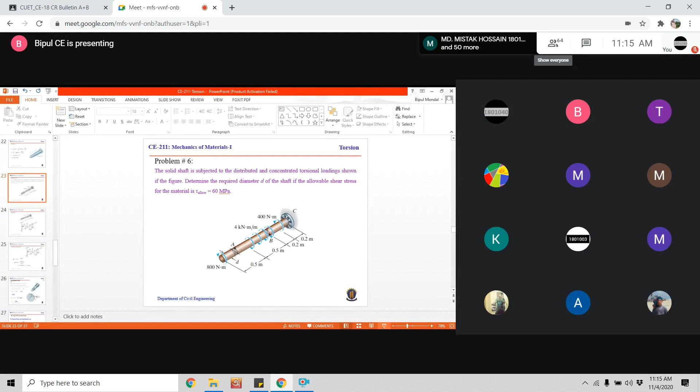Okay, in the last class I discussed how to draw the diagram. Is it clear to everyone? If this part is not clear... I drew this diagram in the last class. So is it clear to everybody? Basically, I am briefly explaining the problem.

Actually it is a solid shaft, and one end of the shaft is fixed to a support C at C. C is a fixed support. So, do you know what is fixed support, or what is indicated by fixed support?

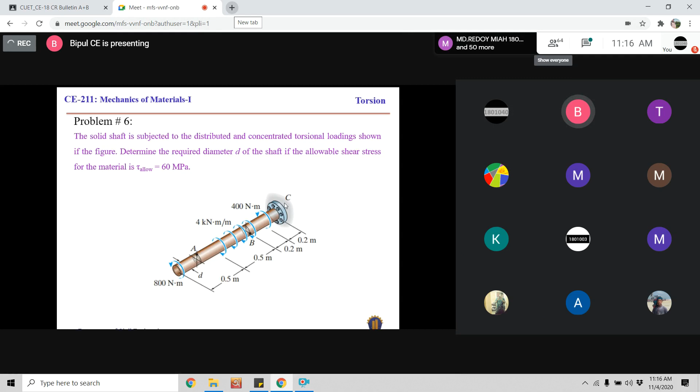Can anybody please tell me what is fixed support? We have learned many kinds of support. Hinge support, roller support, and another one is fixed support. Fixed means for any kind of material, any kind of applied load, basically axial force, shear force, bending moment, torsional force.

For different types of loads, the structure may be elongated or shortened. That means its length may be increased or decreased. That is one response. And another response is the structure may be bent, meaning it may be deflected downward or upward. That is bent, the effect of bending moment.

And for torsional force, the structure may be twisted, meaning the section will be rotated. So those are the responses: length may be changed, or the straightness may be changed, meaning a straight member may become curved. Initially it may be straight, but due to applied load it may be curved, and there may be rotation.

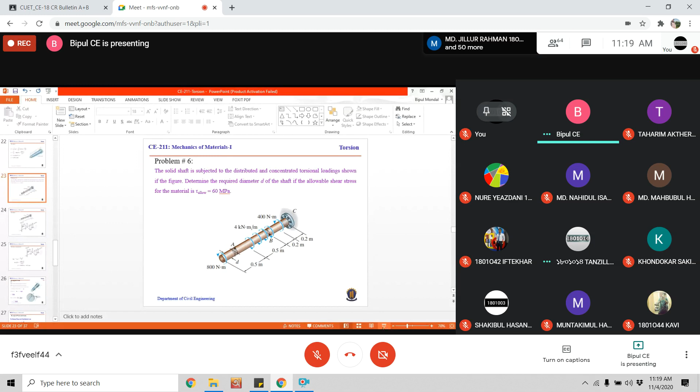So the strength of the material, allowable strength of the material, is 60 MPa. Strength of the material means the maximum capacity of the material. So if we consider the axial force, how much maximum load the structure or material can carry before failure, that is the strength.

But this one is the allowable stress. Allowable stress means, for example, a steel rod can carry 500 kilonewton tensile force, but for design purposes, we will assume that the steel rod will not carry 500 kilonewton until failure. We will assume it is 400. That means we will consider that if the applied axial tensile force is 400 kilonewton, then that rod will fail. In that case, 400 is known as the allowable axial force.

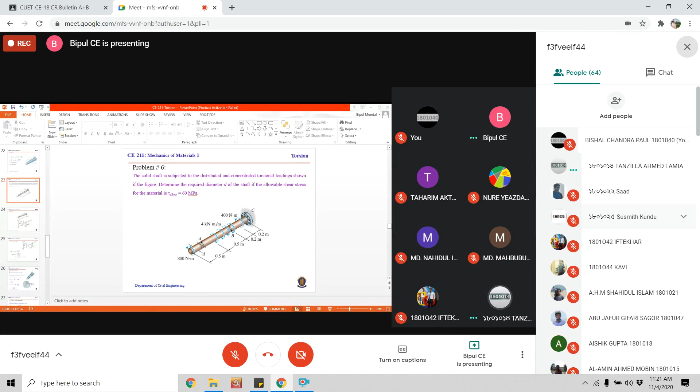Excuse me, someone's mic is causing noise. Roll number 1801014, you're muted, noise is coming from you.

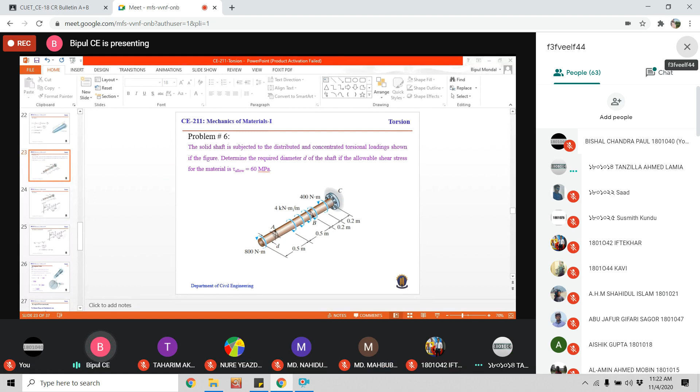Okay, so I was explaining what is strength and what is allowable strength. Strength means the maximum capacity until failure. But as the strength or capacity of the material may vary from sample to sample or location to location, that's why we apply some safety factor.

Safety factor means although the laboratory test indicates that this rod can carry 500 kilonewton tensile force, in the design process we will assume that if the applied load to that rod exceeds 400 kilonewton, then that rod will fail. In that case, that 400 kilonewton force is known as allowable tensile force.

So for the design process, we will not exceed the allowable limit. The allowable limit may be in terms of force or in terms of stress. That means we will assume that if the internal force, which may be stress or total stress or force, exceeds the allowable limit, then that structure will be failed.

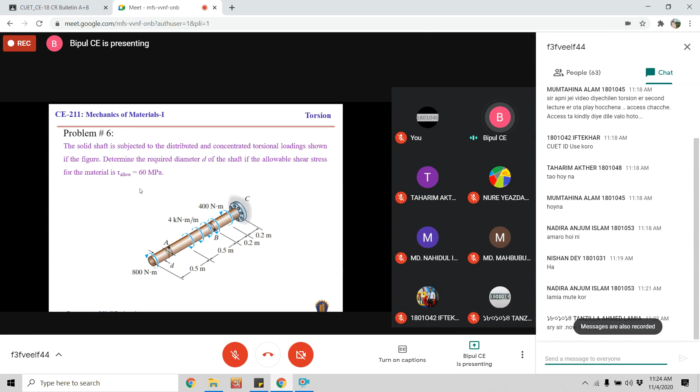One thing please: if I say stress, always assume it is shear stress, because we are talking about torsional force. Due to torsional force, only shear stress will be developed. So whenever I say stress, you will understand that it is shear stress, unless I say it is axial stress. So stress means shear stress.

So the allowable shear stress of the material is 60 MPa. That means if the shear stress at any point in the structure exceeds this value, that means if the shear stress is greater than 60 MPa anywhere in the structure, then that structure will be failed.

So to maintain the safety or integrity of the structure, that means to avoid failure of the structure, we will apply the load to the structure, or we will provide the section of the structure so that the maximum stress anywhere in the structure will not exceed this value.

So the allowable stress is 60 MPa. Then the diameter of the rod is not given; that we have to determine. Actually, this diameter means the minimum diameter. So what will be the minimum diameter that will carry or resist this applied torsional force?

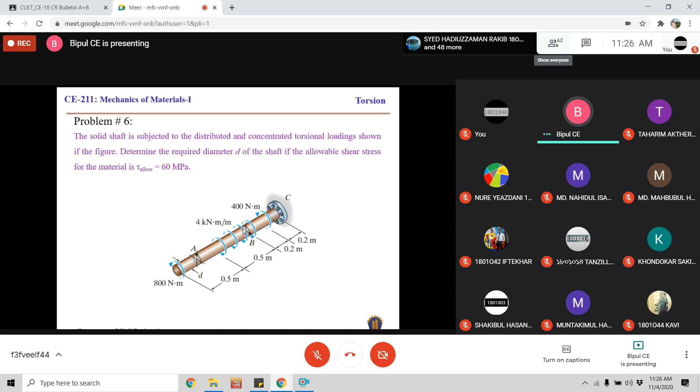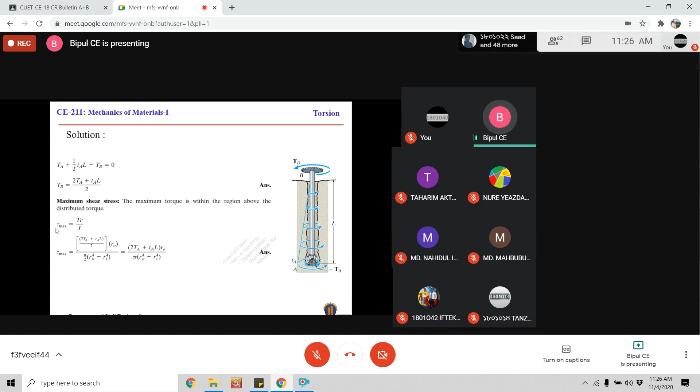So from the torsional stress equation, the equation of maximum shear stress is expressed by this equation. This is the equation of maximum shear stress due to torsional force. Here T is the torsional force, C is, for a circular shaft, the radius of the section, and J is the polar moment of inertia of the section.

So from this equation, it is clear that the value of maximum stress depends on the value of maximum torsional force. If the cross section of the shaft is circular, then C will be constant, that means the radius of the section, and J is the polar moment of inertia. So for any specific section, these two terms are constant. Therefore, the maximum shear stress depends on the maximum torsional force.

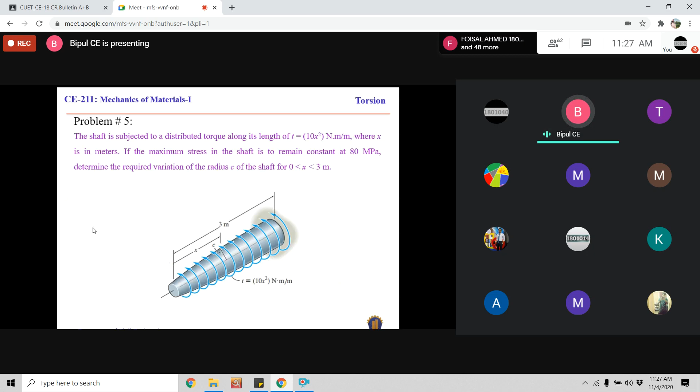So in this equation, this torsional force is the internal torsional force. That means if any structure is subjected to any torsional force, then a torsional force will be developed in the structure, and that is known as internal torsional force.

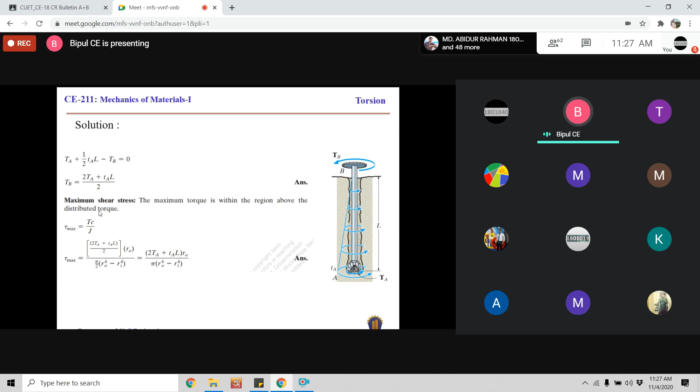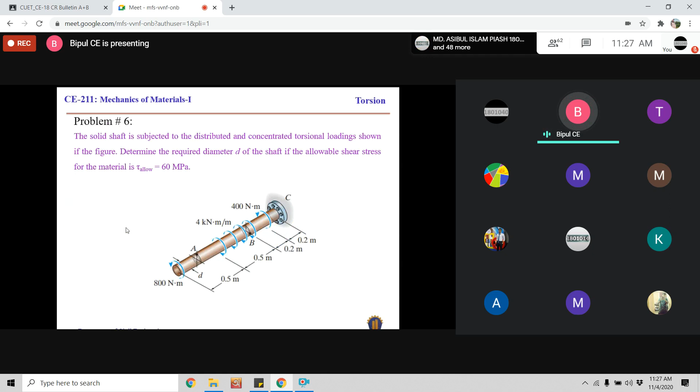So this T indicates the internal torsional torque, not the applied torsional torque. Okay, so we have to determine the diameter. According to the previous equation, we have to check

that the maximum shear stress in this shaft will not exceed this limiting value of 60 MPa. So we have to determine the maximum shear stress, the location of maximum shear stress.

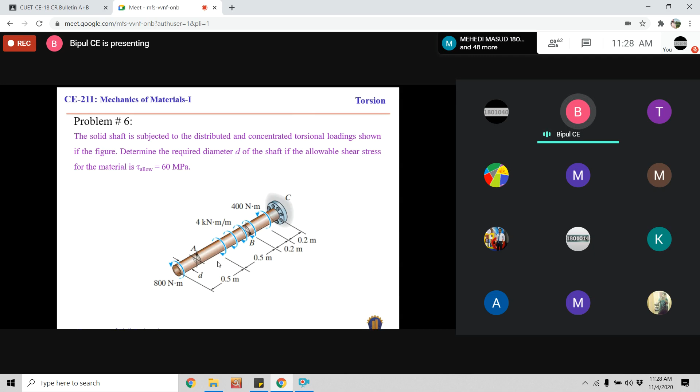From that equation, we have seen that the equation of maximum shear stress depends on the value of maximum internal torque. So we have to now find out where is the maximum resultant internal torque, and to determine it, we have

to see the variation of resultant internal torque along the length of the shaft, and from that variation we can figure out what will be the maximum internal torque, and that is indicated by this diagram. That is the torsional force diagram. So this diagram indicates the value of resultant internal torque at different locations.

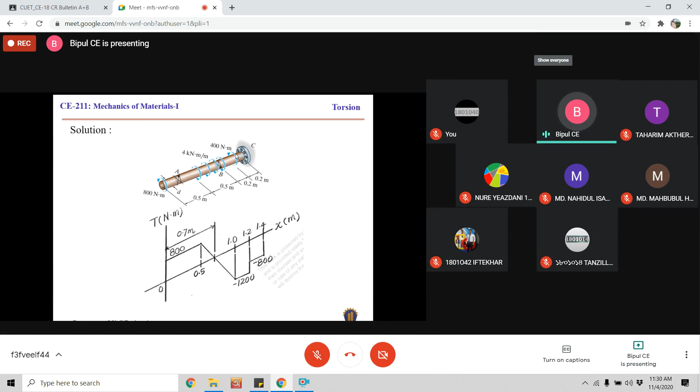So to draw this diagram, we have to start from one end of the structure. We can start from C, or we can start from here. We will start from here, then we will go towards the support. Then actually we will cover some length, and then that length is indicated by this axis.

And then if we go along this line, then we will face different internal torque, and that torque will be represented along this axis. So this axis indicates the internal torque, and that axis indicates the length of the shaft, or the location along the shaft from one end. So assume at this point the length is 0.

So if we move from here to here, then first we will face this internal torque. Then in this segment there is no additional applied torque, and if we cross this point, then we will face this applied uniformly distributed torque. And then if we cross this point, in this zone there is no additional applied torque, and if we reach this point, then we will face again this concentrated applied torque,

and in this zone there is no applied torque. So first of all, if we start from here, and if we just reach this point, then we will face this applied torque, and then according to the thumb rule, this torque is a positive torque.

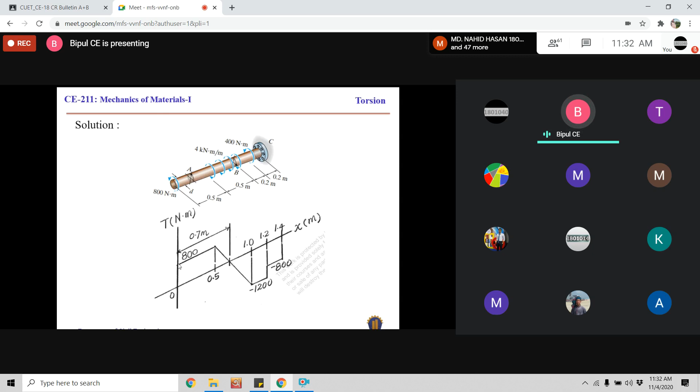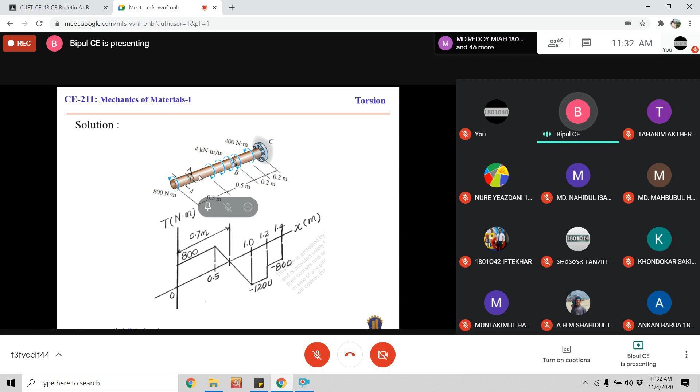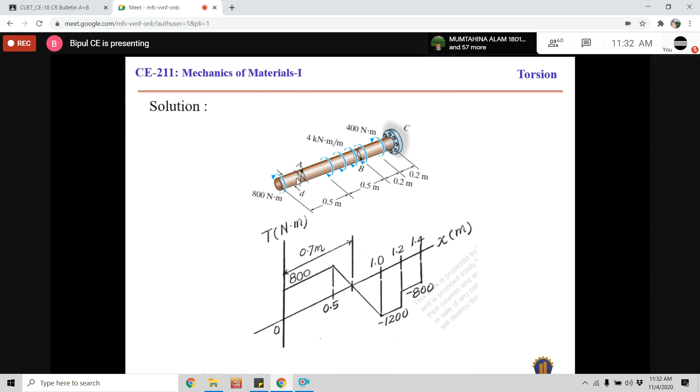And if you come anywhere in this segment, the internal torque will be similar to 800, because if you come here, you will see that the applied torque is 800, so the internal torque will be 800. So if you come to another point in this segment, similarly, as the applied torque is 800, the internal torque will be 800. So in this segment, from this point up to this point, there is no additional applied torque except this torque. That's why this line has gone along the x-axis, that is, the horizontal direction.

So up to this point, the internal torque will be 800. And then if you just cross this point, then you will face this uniformly distributed torque. So if you reach from this point to that point, then you will face additional applied torque, and that is 4 kilonewton meter per meter.

That means in 1 meter, the total applied torque is 4 kilonewton meter. So the total length from this point to that point is 0.5 meter. So the total applied torque in this segment will be 2 kilonewton meter, because this amount of torque is applied in 1 meter, but the segment is 0.5, that means half a meter. So in this segment, the total applied torque will be 2 kilonewton meter.

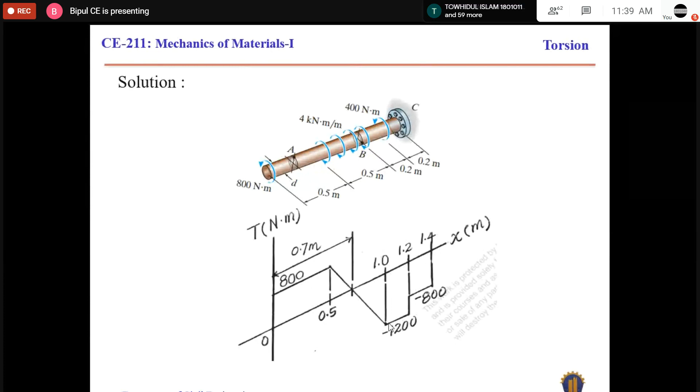So the maximum stress will be developed here. If we apply the equation of maximum stress, this is the maximum internal torque, C is the radius, J is the polar moment of inertia. C is the half of diameter, and this is the equation of polar moment of inertia.

This maximum stress will be similar to the allowable stress, that is 60 MPa. To convert into Newton per meter square, it is multiplied by 10 to the power 6. From this calculation, we have seen that the diameter of the shaft is 46.7 millimeter. It means that the minimum diameter of the shaft will be this one. If the diameter of the shaft is equal to or greater than 46.7 millimeter, then the maximum shear stress will not exceed this value.

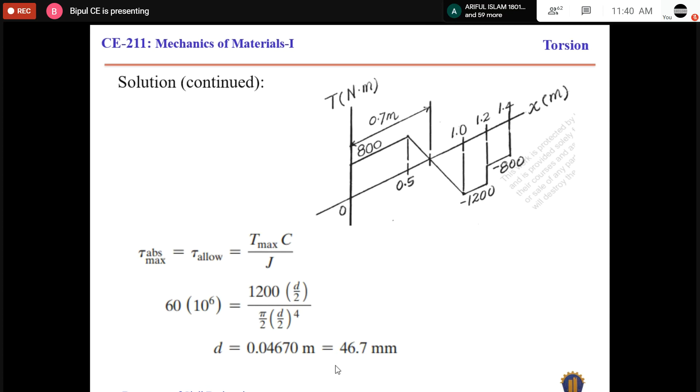And if the diameter is less than this value, then the maximum shear stress will be greater than this value. In that case, the shaft will fail.

And that is the angle of twist. I have already explained it in the last class. So angle of twist means the relative angle of rotation of one end with respect to the other end.

So this is a shaft having variable cross section. One end is fixed, another end is free. So Tx - this shaft may be subjected to a different amount of torque. So the torque will not be constant along the length.

So at a location, at a point located at x distance from this point, if the internal torque is T, that is indicated by Tx, because the internal torque is not constant along the length if the shaft is subjected to different amounts of applied torque. That's why it is indicated by Tx.

That means T is the internal torque. It depends on the location of the point. And Jx also, as the section is variable, so J will be different at different locations, and it is designated by Jx. That means the polar moment of inertia as a function of x, and theta is the angle of rotation or angle of twist of this end with respect to the other end.

So according to Hooke's law, the equation of shear strain is this one, and we know the equation of shear stress due to torsion is this one. Substitute this equation here. Substitute the variable terms here, Tx and Jx. And again, if you substitute here, then the general expression of shear strain will be this one.

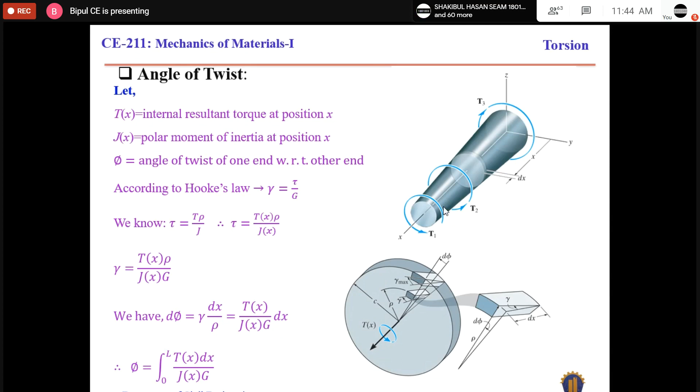So we have to integrate this equation from this to that, or from this to that. So it is 0 to L, where L is the total length of the shaft. So this is the general expression of the angle of twist.

And there are two expressions for some specific cases. If the cross section of the shaft is constant, and if the shaft is subjected to a constant torsional force, then angle of twist will be determined using this equation. But if the section is subjected to different amounts of torsion, or the cross section of the shaft is variable at different locations, then we will determine the angle of twist for each segment.

And if we sum the angle of twist of all segments, then we will get the total angle of rotation from one end to the other end. And it is explained by

this problem. Actually, it is a solid shaft. One end of the shaft is A to E. At E, the shaft is fixed to a support, and there is another support B, and this B is frictionless. That means if we rotate the shaft, no friction force will be developed at this location, and 3 gears are attached to this shaft. One gear is at A, another one is at C, another one is at D, and 3 torsional forces are applied by 3 gears.

At A, torsional force is 150, at C 280, at D 40. And there is a tooth P on gear A. Now we have to determine the total angular displacement of this tooth P, because due to applied torque, this tooth will be rotated either along clockwise or anti-clockwise direction.

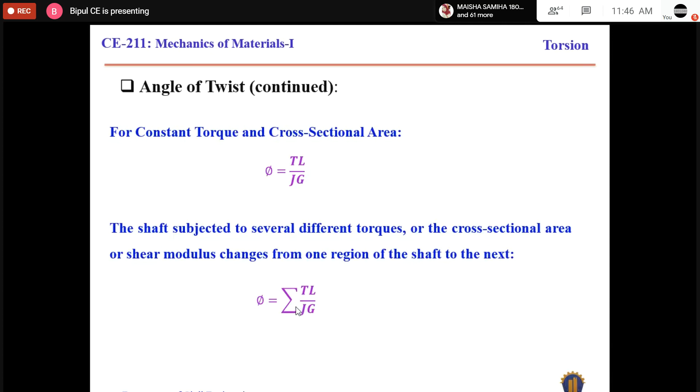To determine the angle of twist, we have seen that there are 3 segments: one A to C, another C to D, and another D to E. These 3 segments will be subjected to different amounts of internal torsion, so we have to apply this equation. To apply it, we need the length of each segment and the polar moment of inertia of each segment. Since the shaft is constant along the length, these will be constant, so only the length of each segment and the internal torque will vary.

So the length of one segment is 0.4, another is 0.3, and another is 0.5. We have to determine the internal torque developed in each segment.

In segment AC, the internal torque is 150, because if we cut anywhere in segment A to C and draw the free body diagram, and consider the equilibrium condition, the applied torsional force will be equal to the developed internal torque. According to the thumb rule, this one is positive. So in segment A to C, the resulting internal torque will be positive 150.

Similarly, for segment C to D, we cut in the segment and draw the free body diagram. From this free body diagram, the positive internal torque is 150, but this one is negative according to the thumb rule, so the resultant internal torque will be negative 130. Again, by a similar process for segment D, the internal torque will be negative 170.

We know the equation of angle of twist is TL by JG. For segment AC, internal torque is 150 and length is 0.4; for CD, internal torque and length are as given; and for D, likewise. From this calculation, we get the total angle of rotation of gear A with respect to the support, which is 0.2121 radian, and it is negative.

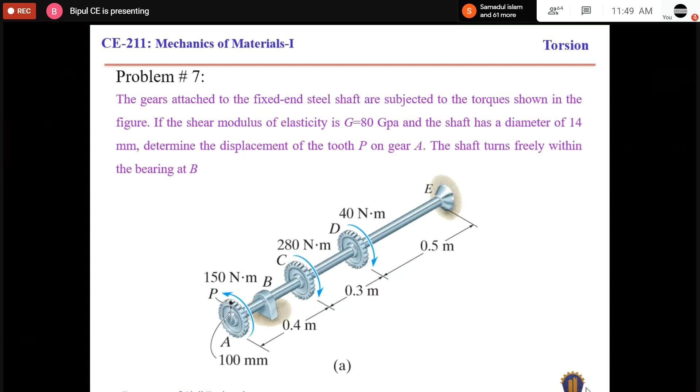No, not negative. Negative means it is this direction. We have considered that the internal torque will be along clockwise, right, along clockwise. So if we apply the equilibrium condition, that means applied plus developed equals zero, right?

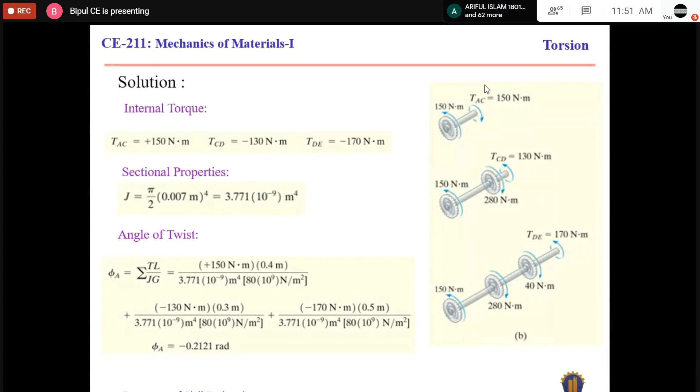So it will actually be positive 150, and that is negative 150, right? So this one will be negative, this one is positive, this one will be negative according to the sign, right? So if we take this term to the right side, that one will be positive. Say it is x, so it will actually be positive 150 minus x equals zero. Right, positive, so it equals zero.

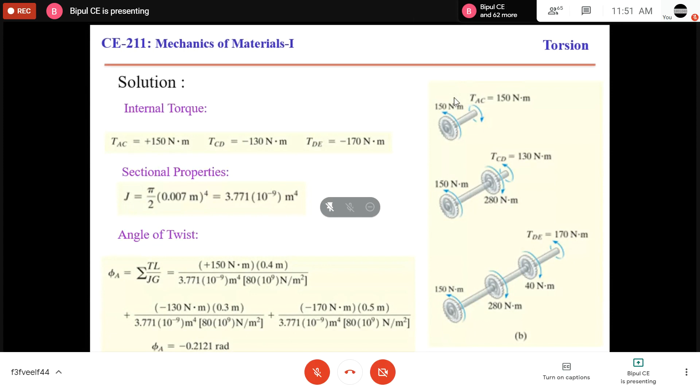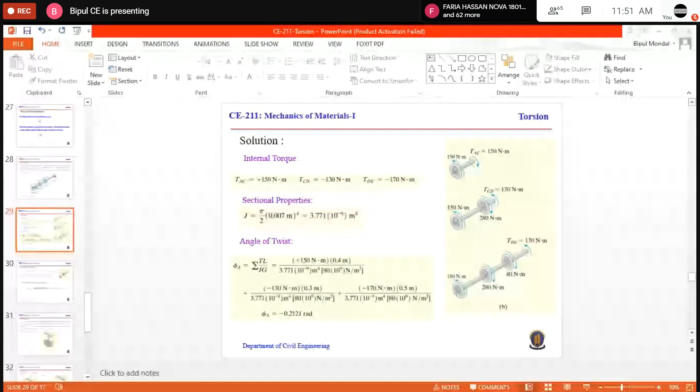Any other question? No, sir. Okay, so no more today, as you have no question, so we can stop the class, right?